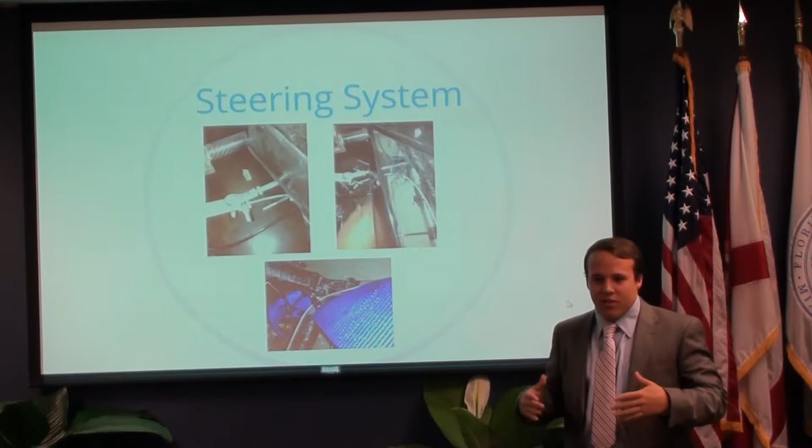So for the sake of time, I'll jump right into my part, which is designing the steering and the wheels and brakes. First, the steering. It was very simple. We designed a steering with a steel braided cable with 4 pulleys that went around the driver. As you can see, this left handle here, this cable was directly attached to the hub. So as you pull the cable, the wheels were turned. According to our calculation, we didn't have to turn more than 15.8 degrees in order to clear the turns, which are very wide. So steering was never a problem.

For our brakes and wheels, we used recumbent tricycles, which are the closest application to what we designed for the competition. So as far as load and braking, recumbent tricycles work perfectly. So with no further ado, I just want to pass along to Brian Acosta, who will talk about the frame and the body of the car.

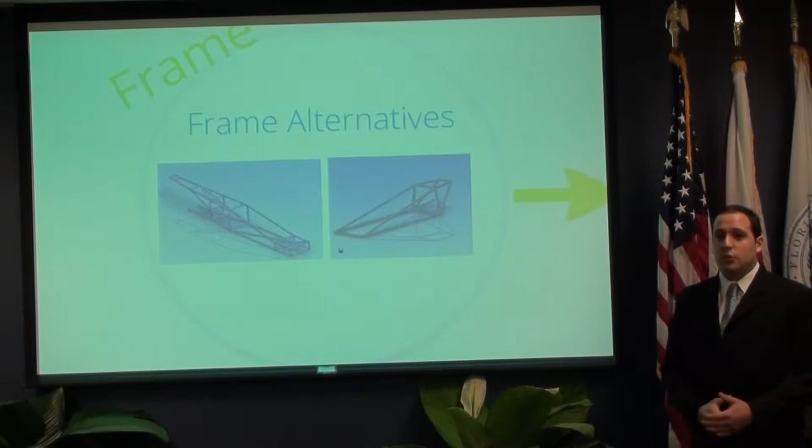Good morning. As Fernando pointed out, my name is Brian Acosta, and my job in this team was to do the frame and the body of the car. To get started, here we have some pictures of the initial frame drawings. As you can see in the picture on the left, the initial frame was actually a very complex one, and it used up a lot of material. We felt that it was unnecessary for it to have so much material, so we started designing simpler designs. The picture on the right is a simpler design, and this one right here is actually our final frame design. It's only missing 2 diagonals in the back, but I'll go into more detail on further slides.

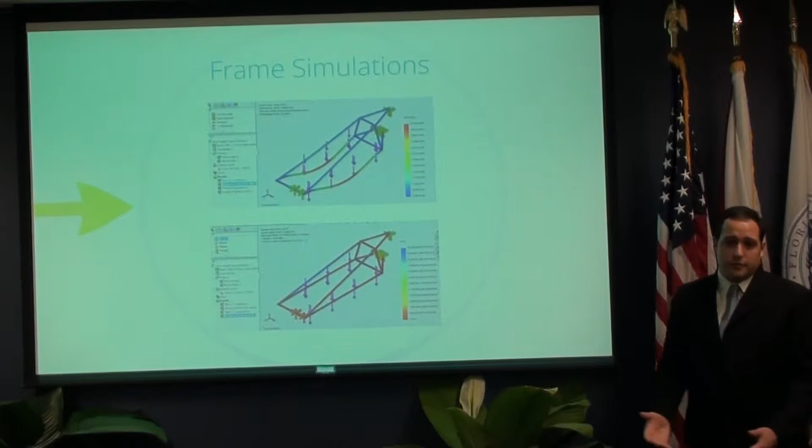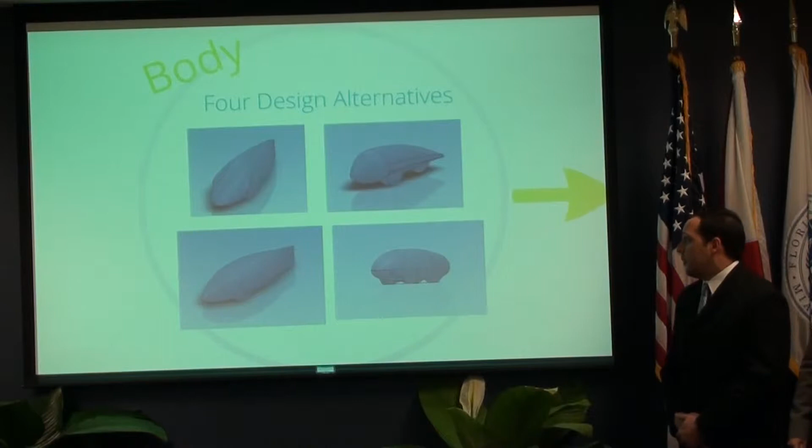And as you can see, the one thing that all those drawings have in common is that we intended for the wheels to be inside of the body in order to improve the aerodynamics of the car. But as you can see in the next slide, we actually had to make a lot of changes to our design, because of constrictions, because of the frame and the size of the engine and the location of the engine. In this picture, you can see that only the back wheel is being covered by the body of the car. The two front wheels would be on the outside of the body.

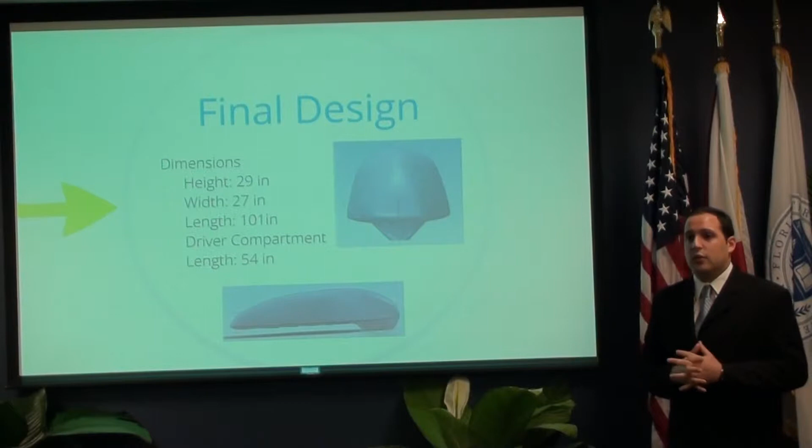Our final design, as you can see here, is a front view picture of the body and a side view. Just to give you some specifics, the maximum height of the car was 29 inches, the maximum width was 27 inches, the length was 101 inches, just a little under 9 feet, and the driver compartment where the driver was actually sitting was 54 inches. That means that it had to be a driver that was 5 feet or lower, which in our case is what happened. We had one driver that was 5 feet tall and the other one was 4'11".

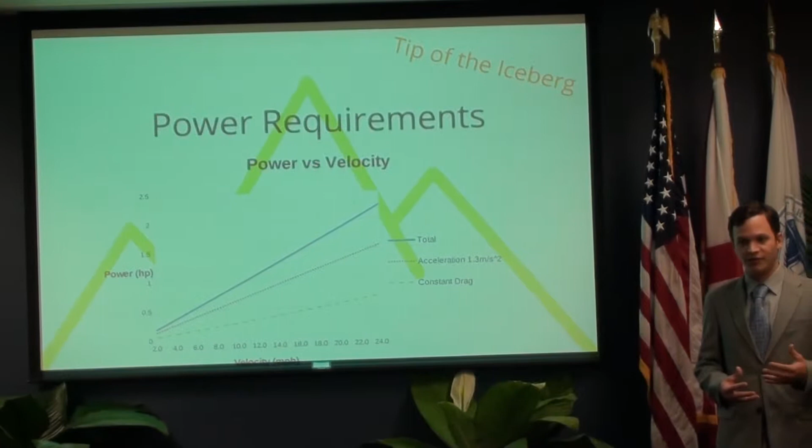Now moving on to the engine selection, Marco's gonna explain to you the process. Okay. My name is Marco Betancourt. I am the engineer responsible for choosing and implementing all the powered systems in the vehicle. We began this assessment by finding out how much energy was required by the vehicle in order to be propelled and how much power would be needed to produce this energy.

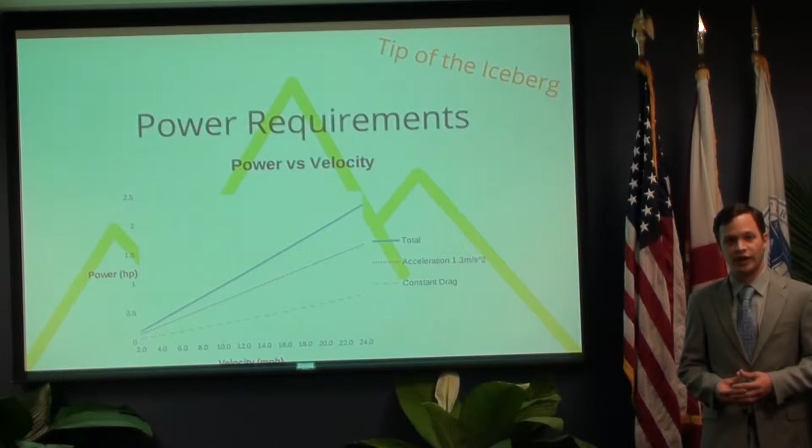So based on acceleration parameters and expected drag, we came up with a number that was about 2 horsepower for our engine power. So we continued to make a database of engines, and we found all of them between 20 cc's and 50 cc's. All of them are 4-stroke due to competition guidelines, and the parameter that we used to choose the engine was based on the compression ratio that the engine could achieve. We didn't do any modifications to the engine itself, so having one that was stock with the highest compression ratio was very important.

So we found the GY6 Scooter engine, which is a 50 cc engine, and has the highest compression ratio in its class at 10.1 versus other engines designed for utility applications like lawnmowers, which are 8.1. We also chose that engine because it had a lot of the auxiliary systems that we needed for the vehicle, and it also had a large aftermarket of parts that we could use to modify it and improve it.

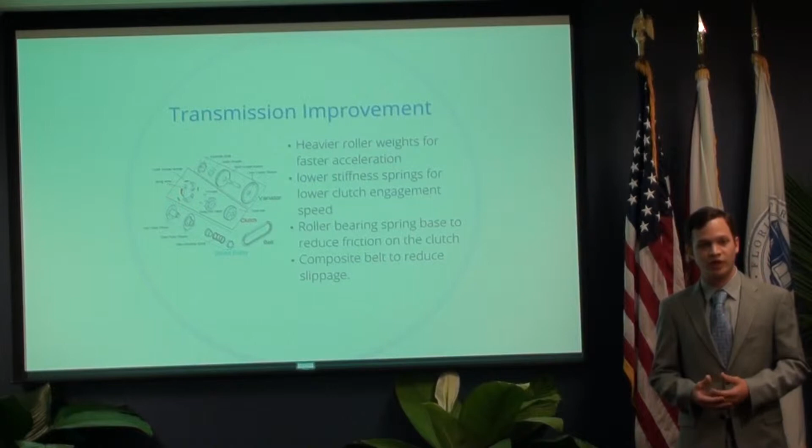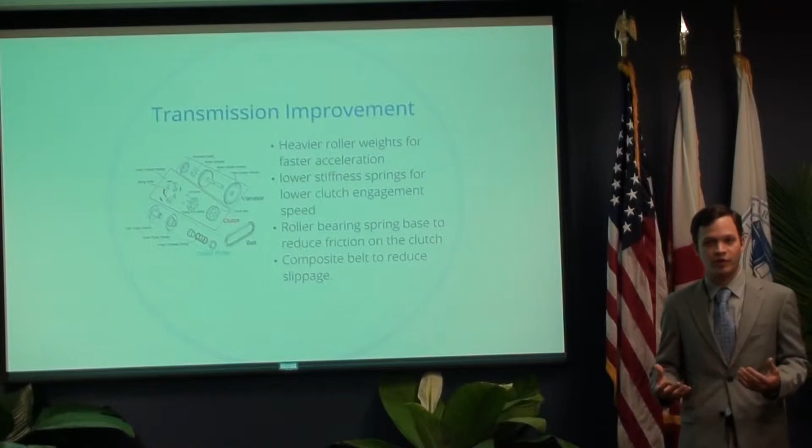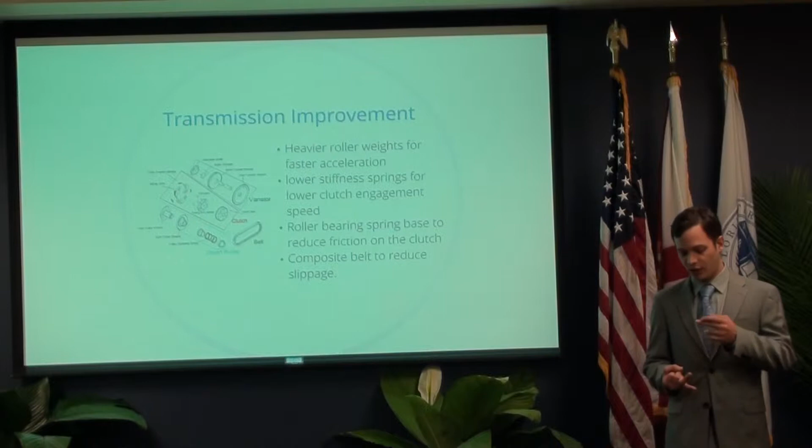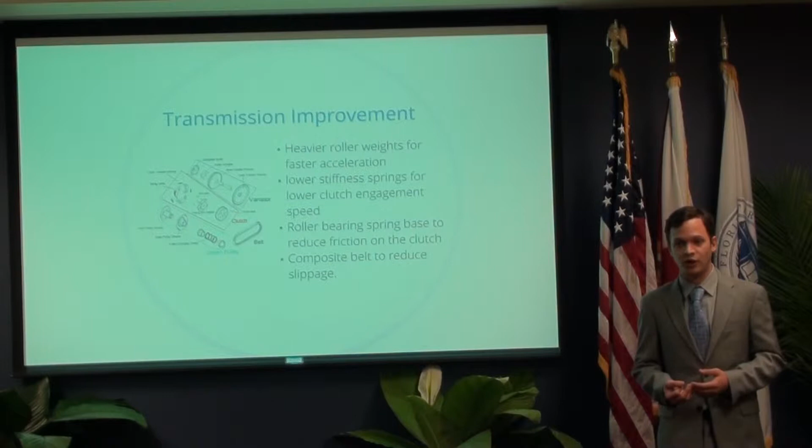To continue with the improving of the engine, one of the items that has the most inefficiencies is the transmission. It's a continuously variable transmission, and we address these inefficiencies by choosing parts from the aftermarket to reduce friction in the CVT, also decrease the engagement speed of the clutch based on the engine speed, and also increase acceleration at the expense of final velocity.

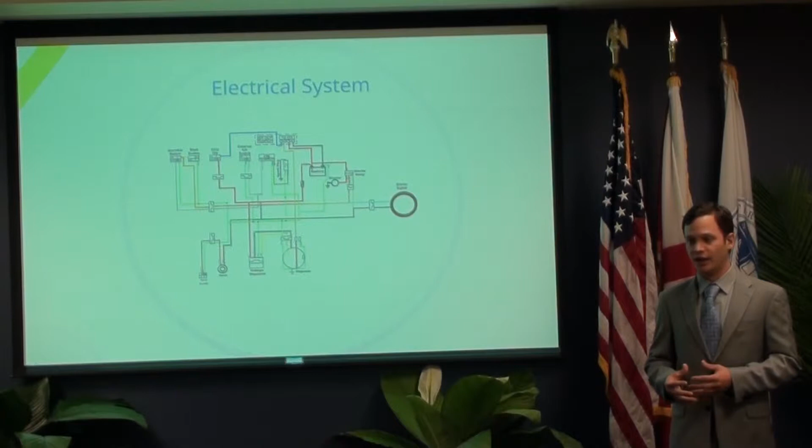So once that was set up, we continued to produce the electrical system for the engine. We began this by getting the same electrical wiring harness that came off the scooter where we got the engine from, and we stripped it down through all the unnecessary auxiliary stuff that the scooter came with, and included just the signaling lights and kill switches that the competition regulations specify.

One thing to know about the electrical system is that we used a lithium-ion battery, which failed halfway through the competition. So just as the big plane companies are having problems with them, we did too. So going with a lead-acid battery is the way to go.

Then we had to produce the fuel pressurization system because the competition guidelines say we cannot use an electrical fuel pump to pressurize our fuel. So we created the system. It includes a soda bottle that's a pressure vessel. It's rated to 200 psi, so it was never a safety issue, because the maximum pressure of the system goes only up to 70 psi.

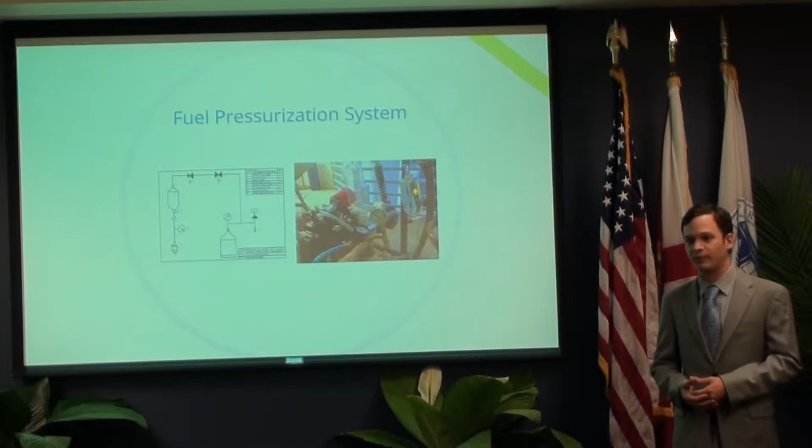The system includes gauges that let us know the pressure both in psi and in bars. It also has a regulator to reduce the pressure from 70 psi down to 36 psi, which is the operating pressure of the injector. We included a safety release valve that pops at 70 psi and a Schrader valve in order to be able to fill it up; it's the same valve that you find in bicycle tires.

Once we had this set up and the electronic fuel injection system was powered on and running, we were able to begin engine tuning. We found that we had to purchase a wideband O2 sensor so we could finally control the air-to-fuel ratio and program it so that it would maintain optimal stoichiometric combustion throughout the whole fuel line. So we did some testing.

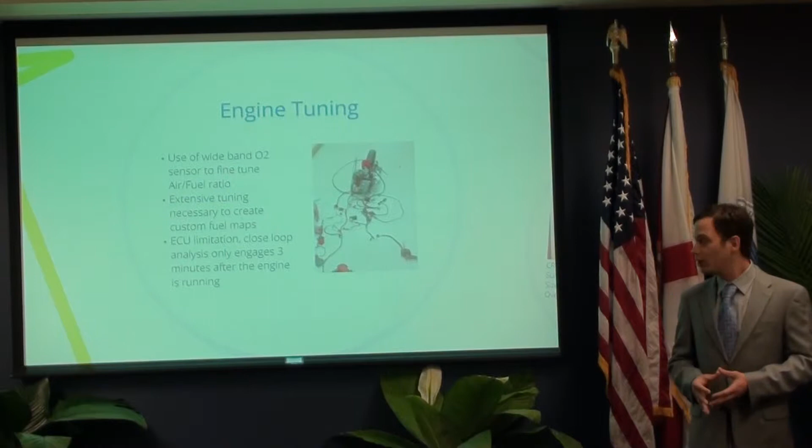We had to make our own fuel maps for this, and we had one problem, which was that the ECU would not start functioning as a closed loop system until about 3 minutes after the engine was started. So we had to really fine tune the fuel maps.

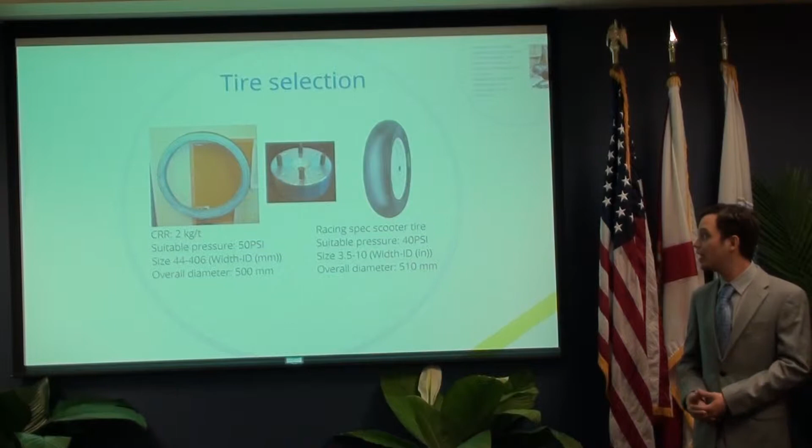Then we had to select the tires. The tire selection was important to reduce rolling resistance, and we chose for the front end of the car 2 of the Michelin tires that are designed specifically for the competition, and they have the lowest rolling resistance in their class. So we went with those.

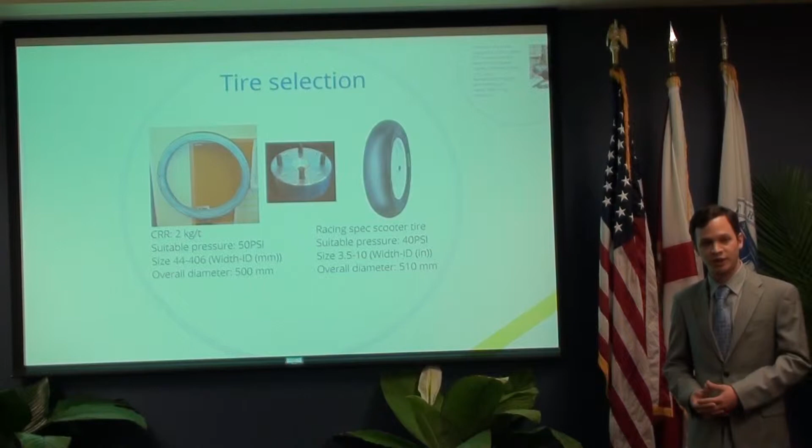For the rear wheel, since we have an engine that's based on scooters and that accepts a wheel directly on its axle, we had to either modify a bicycle wheel to accept this tire or go with a scooter-based tire. So we went with a scooter-based tire, and we got one that's slick, so it minimizes the rolling resistance.

Now I'm gonna pass it on to Brian to talk about manufacturing. Hello again. To start talking about the manufacturing process of our car, I'm gonna start off with the manufacturing of the frame. Obviously, because this is a super mileage competition, we wanted our car to be as light as possible. Because of that, we chose to build the frame entirely out of carbon fiber.

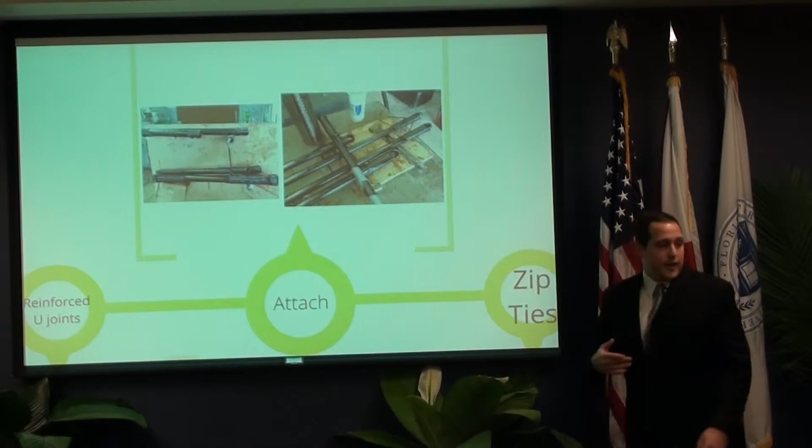In the next picture, you can actually see the entire frame. Here we tied everything with zip ties in order to make sure that our calculations, our dimensions, everything was correct, and that we wouldn't have any problems.

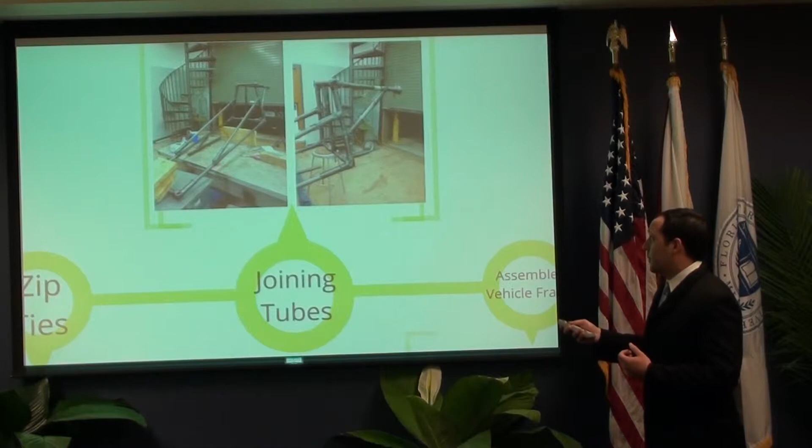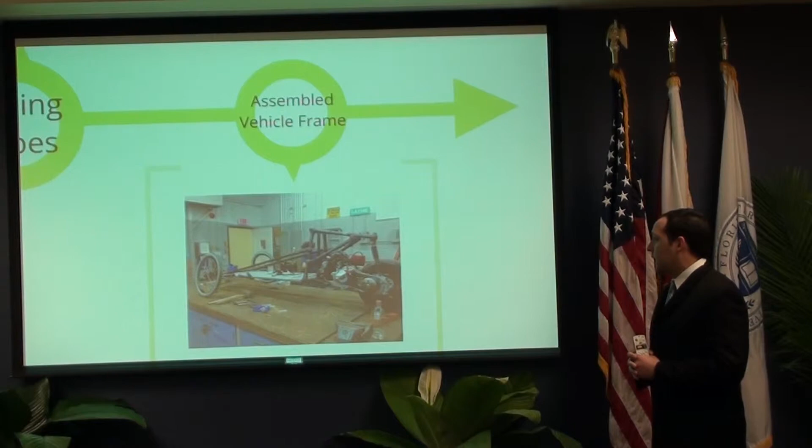As you can see, everything would be connected here with the loops, and the connections would be done to the carbon fiber tubes. In the next picture, you can see the actual end result of our frame. Like I said before, we used even more carbon fiber to wrap everything together, and once we applied resin to that, we had a pretty nice solid piece attaching all the tubes together. Here in this picture, you can actually see the entire frame assembled with everything already mounted onto it except the

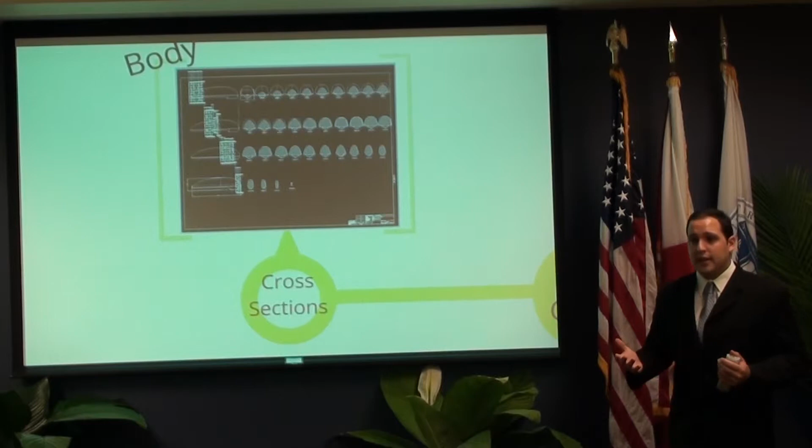body of the car. Now to start talking about the manufacturing of the body, what we did is we used the hot wire foam cutting technique. What we did is we cut some foam, but the manufacturer requested that we provide the cross sections of the body every 3 inches in order for them to cut the foam into the respective cross sections.

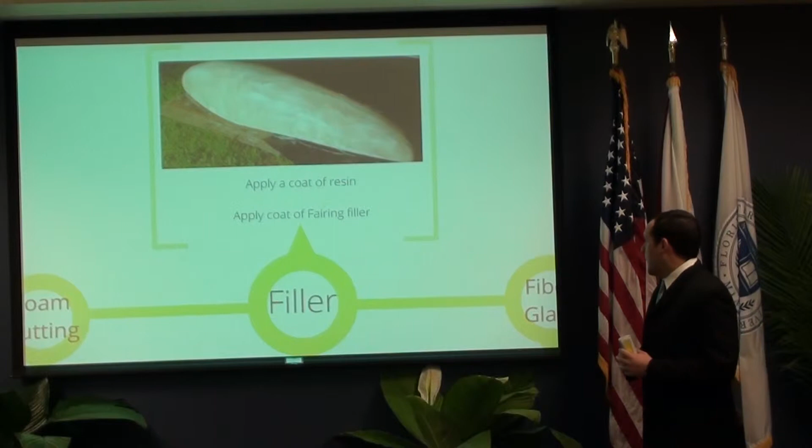Did you work closely enough together that you remain friends? Yes, that's a very interesting question, because throughout this 8-month journey, we really had a lot of arguments and a lot of this and that, but the outcome of the project was so successful in our view, because when you go to a competition, you see teams from universities and high schools that have been doing this project every year, and from year to year, they just tweak a little part of their car to